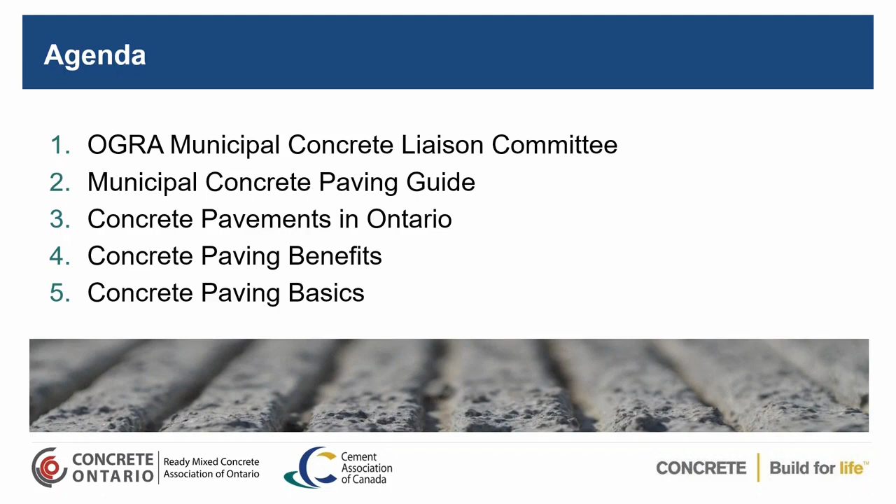Now, the Ontario Good Roads Association Municipal Concrete Liaison Committee has been very busy, and it's a committee that was formed back in 2012 to help address any concrete-related issues on the municipal front. So whether you're looking at sidewalks, bridges, ordering concrete, the committee looks at providing guidance to municipalities about how to do things properly and educating them about emerging trends and specifications.

Now, as I mentioned, the committee has been quite busy over the last few years. We developed 3 different guides. The first guide, the Best Management Practices for Municipal Concrete Infrastructure, is an overview of all sorts of different infrastructure related to concrete, with some best practices guides on how to maintain it and how to build it.

Then 2 years ago, we focused more on flatwork construction. There's still a lot of problems when it comes to sidewalks and curbs, and we wanted to specifically drill in on that subject to help municipalities out, so we developed that guide. And then last November in 2019, we developed the Municipal Concrete Paving Guide, which we will be overviewing today.

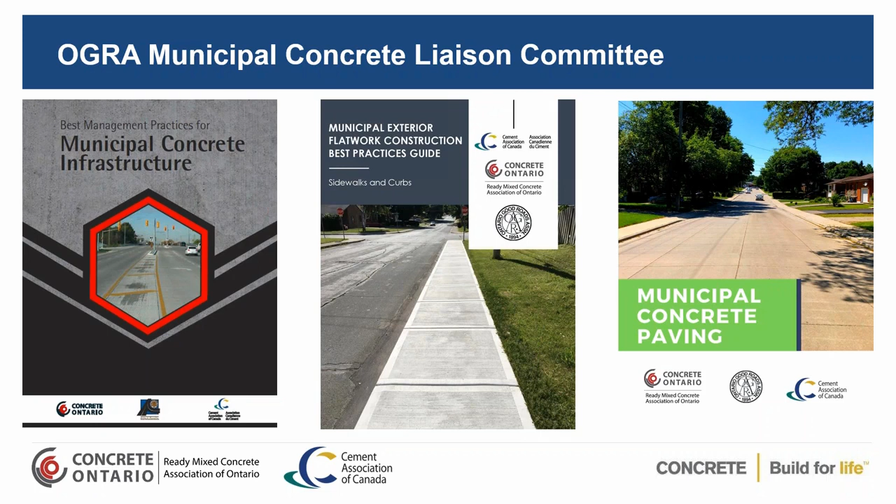Here on the next slide, this guide has been a few years in the making. It's showcasing all the different projects that have been done over the last few years, all local Ontario projects. The guide will continue to be updated and will continue to emphasize the many different applications where concrete makes sense, whether it's a bus pad, a turning lane, an intersection, a road, a roundabout. There are many applications where concrete is simply the superior building material, and that's something we want to showcase in this guide. It is a free document.

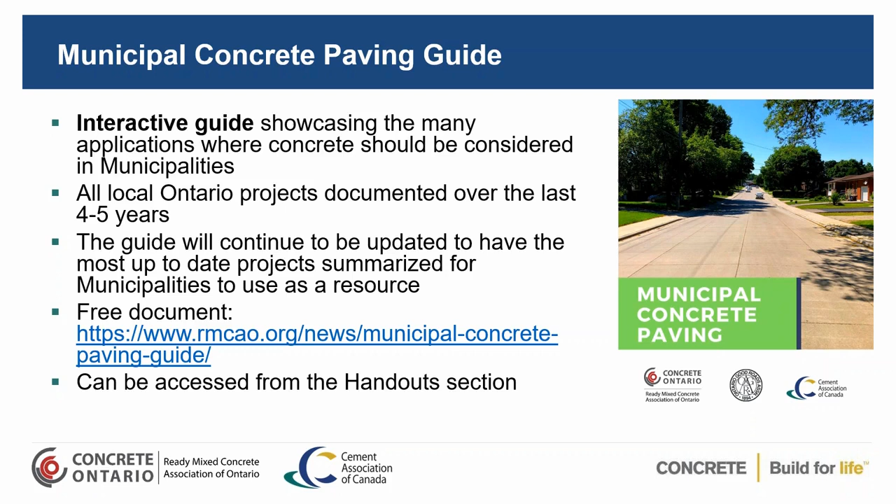It's available on our website, and it can also be accessed from the handout section as part of your GoToWebinar pane. Now, it is an interactive guide, and what do I mean by interactive? Throughout the document, you will find these little PDF icons that say there's an available resource. You can click to explore it. If you click one of these PDF icons in the document, you're able to access all sorts of supporting information.

Documents such as the Integrated Materials and Construction Practices for Concrete Pavement Manual, which is developed by the National Concrete Pavement Technology Center from Iowa State University. They also have concrete pavement distress assessment and solutions. Then we also have, for example, an American Concrete Paving Association Concrete Intersections Guide.

We also work with the University of Waterloo and their CPATT program on a project, so that report is available. And then even OPSS standards when it comes to concrete pavements are also available as part of the guide by using one of the clickable links.

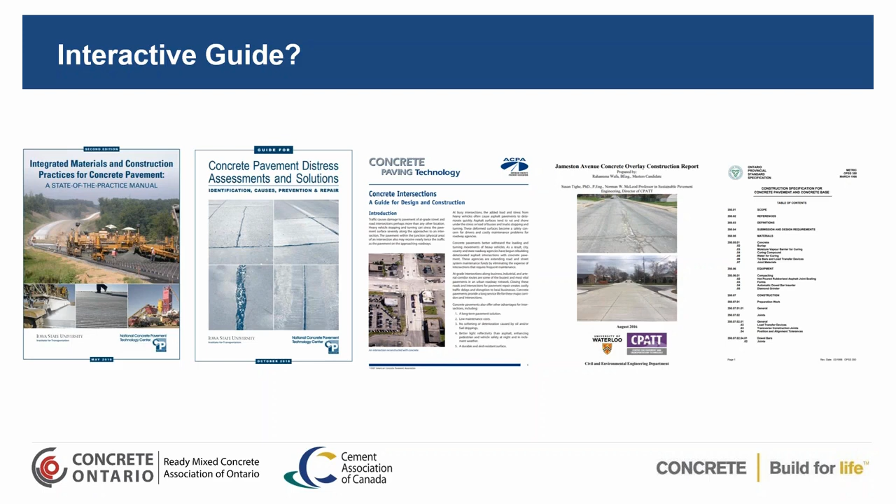Not only do we have supporting documentation available, we also have this other icon throughout the guide, which is a little video guide. If you click any of these video icons, you can pull up YouTube videos when it comes to either construction practices or specific construction practices such as vibratory truss screed paving, for example, here on the screen, transverse tining, curing.

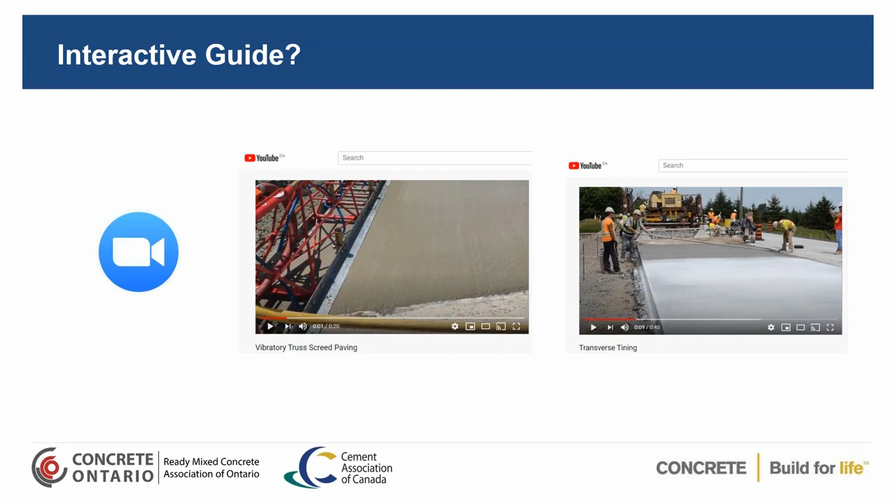There are a few videos available from some of the projects that you can access using this other icon. Now, when it comes to concrete pavements in Ontario, you will see only about 5% of all roads are concrete. Windsor has the highest percentage of exposed concrete pavements, about 40%. As a comparison, in Winnipeg, you're looking at about 80% of the street network being concrete pavements.

So why is it such a small percentage in Ontario? There's numerous misconceptions when it comes to concrete pavements that we do need to address. One, for example, is that concrete requires 28 days to cure, which is completely false. Curing relates to maintaining moisture within the concrete to allow it to gain its durability and strength.

The way we achieve curing with concrete pavements is you spray on a curing compound, which is a very, very quick procedure. You spray it on, it traps the moisture within the concrete, allows the concrete to hydrate and gain all its properties. So again, curing is very, very quick.

The more important aspect is strength gain. You do need about 20 MPa to open concrete pavements to traffic, out of the designed 32 MPa Class C2 concrete. That can typically be achieved with regular concrete in about 4 to 5 days, depending on the ambient temperature. In summer temperatures, obviously you're going to achieve that strength a lot faster versus fall and winter temperatures.

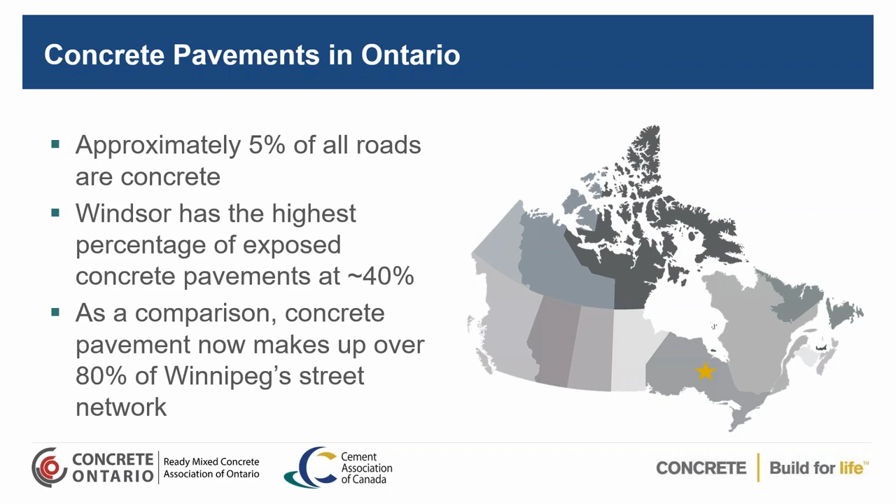You can drill in dowels, re-pour accelerated concrete, and open up that road very, very quickly, minimizing traffic, minimizing congestion. So utility cuts can be done, and it is something we will address in future webinars that will be coming up in the next few months.

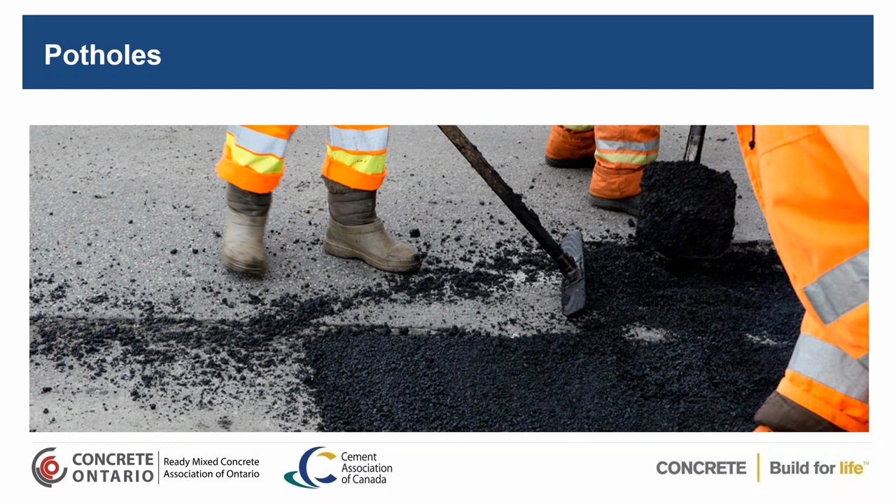Now, one thing I do want to quickly talk about are potholes. We all experience potholes. It is a major deficiency when it comes to asphalt roads. They're dangerous, they can damage your vehicle very severely. But one great feature about concrete is that we do not have potholes. Concrete is a rigid structure that doesn't deform, and overall potholes can be completely eliminated if you use a concrete pavement. Now, just to give an overview of how potholes are actually formed, I'll show you guys a quick video here.

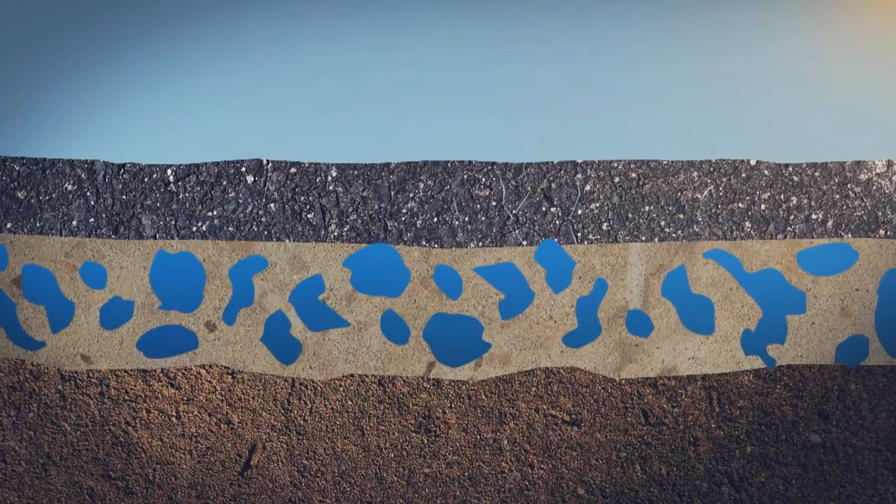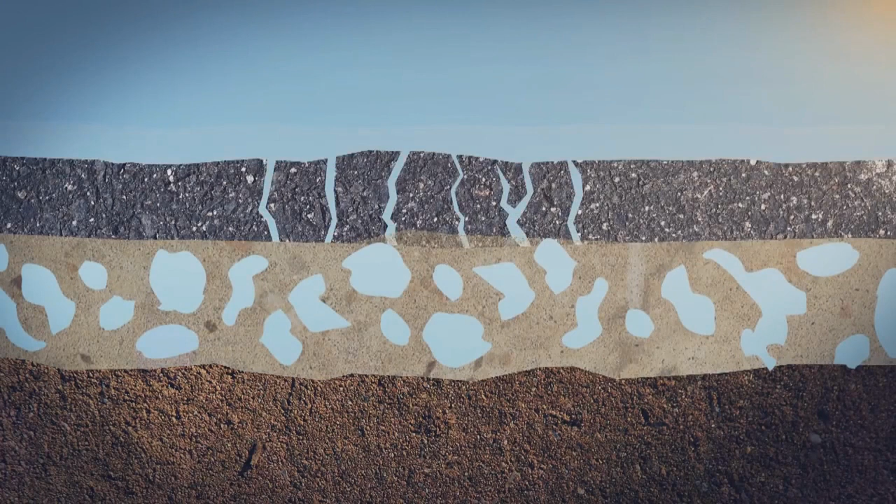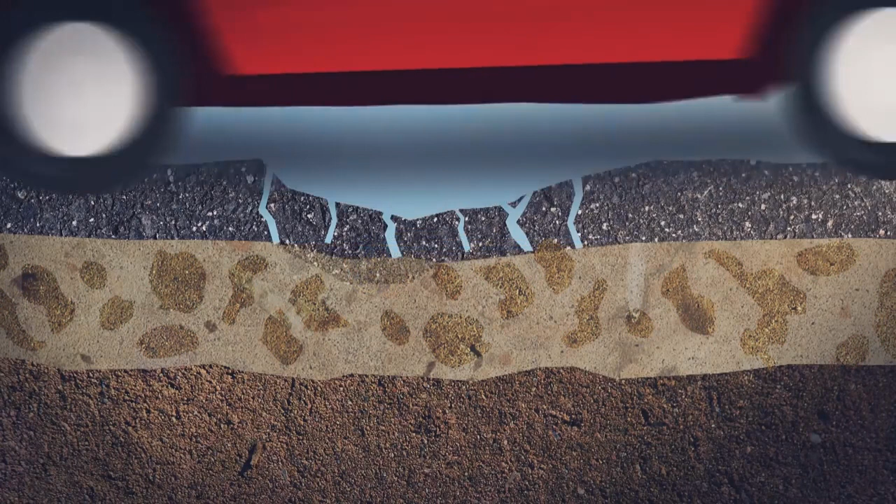Potholes form when water seeps into the road and collects underneath. When it freezes, it expands and pushes up the road's surface. As cars drive over it, more cracks form. Eventually, the sun returns and thaws everything out, including the water trapped below the road's surface. It causes an empty pocket to be formed, and that eventually collapses under the weight of traffic, leaving behind a pothole.

So that's a very quick explanation of how potholes form. And why am I talking about potholes when it comes to concrete paving? Well, it's something that boggles my mind every year. For example, the city of Toronto spends about $25 per pothole every single year, and they budget about $4 to $5 million of their annual budget towards this problem.

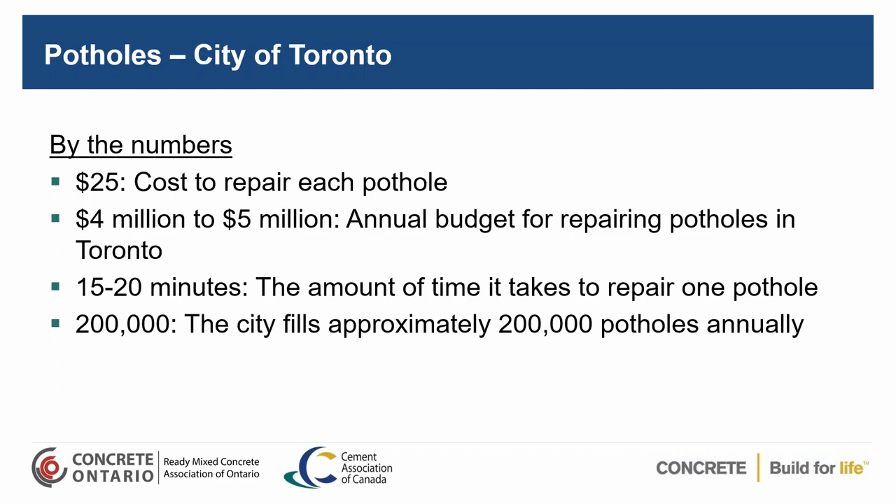It takes about 15 to 20 minutes to fix each pothole, and they expect to fill about 200,000 potholes annually. In 2020 so far, they've already fixed 86,000 potholes, and fixed 12,000 in just the past month since everybody's home with COVID-19 isolation. Crews are able to get out there and have fixed 12,000 potholes just in the month of April alone.

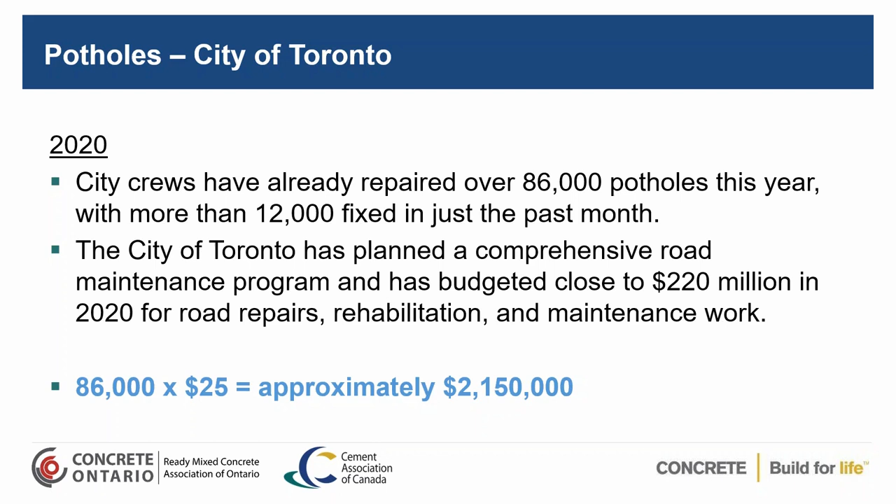Their budgeted cost for road repairs, rehabilitation, and maintenance work is about $220 million, and of that, $5 million is just to repair potholes. So far, the city of Toronto has spent $2.1 million approximately on potholes already. They are projecting to spend another 2.8 million by the end of the year. But it is very mind-boggling that we spend $5 million a year fixing a problem that will continue to happen.

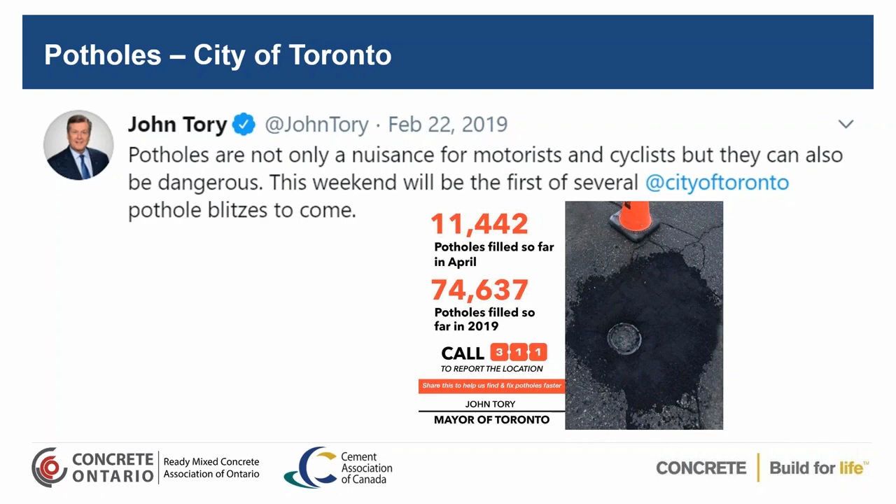John Tory even tweeted last year that potholes are a nuisance, they can be dangerous, and then he kicked off the annual pothole blitz of fixing potholes. And then it's being glorified how many potholes can be filled - 74,000. This is a tweet that was sent out last year. They already filled 74,000 potholes at this point, and it continues to be an issue.

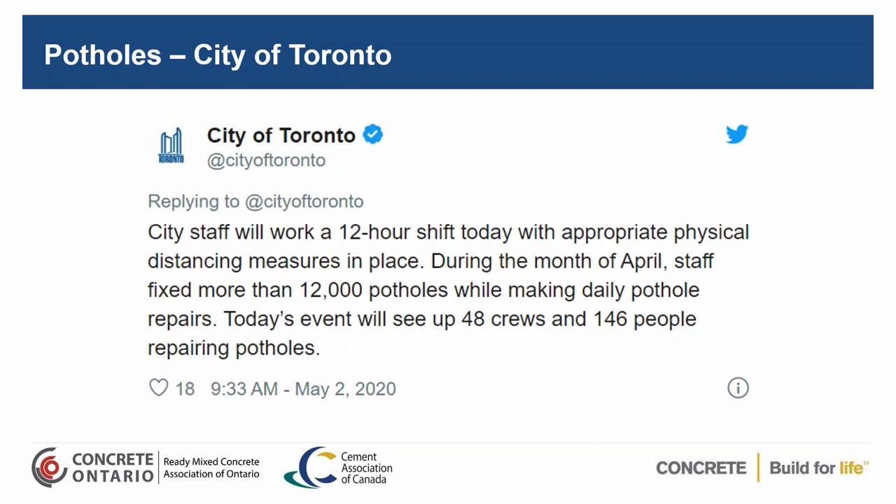Now, this really boggles my mind, considering there is a better solution, there is a better alternative. And this great picture over here - when I saw it, the first thought that came to mind was, maybe we should try concrete. Maybe there's a better solution to all this. Maybe we shouldn't spend $5 million trying to put a Band-Aid on a broken arm. This will not go away, and maybe we should look at an alternative when it comes to road maintenance.

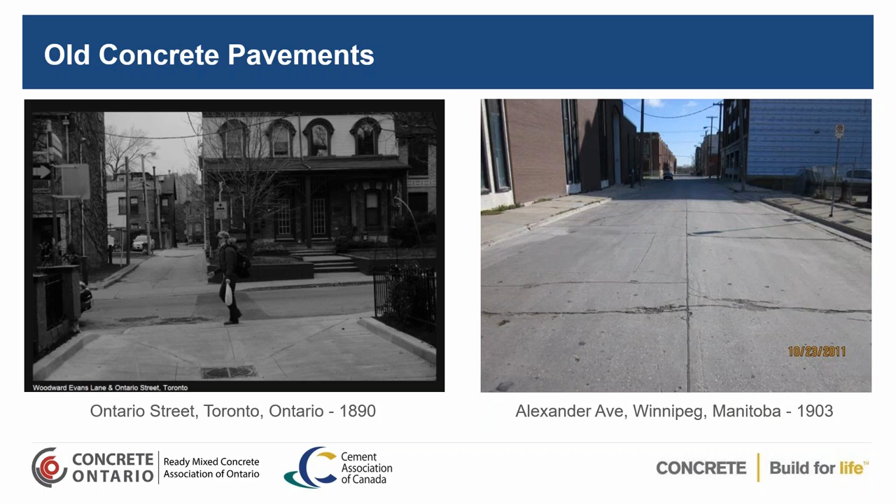So what we're going to do is show you a video the cement, concrete, and aggregates industry in Australia developed, trying to show the benefits of concrete pavement. The American Concrete Pavement Association took that document and modified it. So the next slide will be a little video on why you should choose concrete pavement. Concrete roads are the strongest and most durable, performing better under heavy traffic loads and lowering costs across the lifetime of the asset.

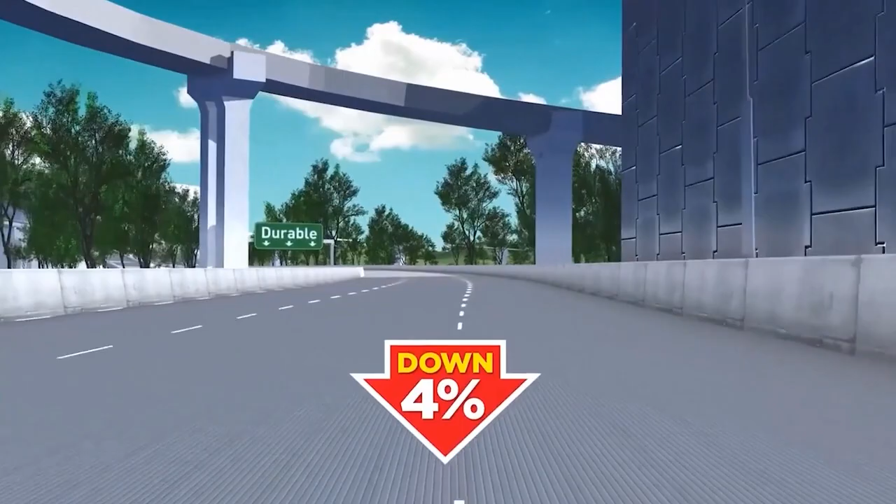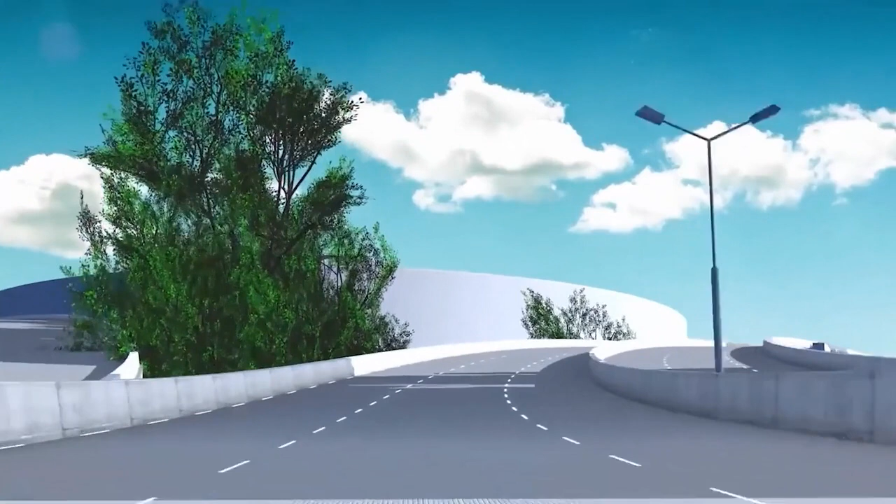And because concrete is rigid, it doesn't deform, leading to heavy vehicle fuel savings in the order of 4% when compared to alternatives. Concrete pavement is also durable in any environment - no rutting, no potholes, no shoving. Concrete road surfaces are engineered to be skid resistant, and in fact, stopping distances are shorter, especially in wet weather. Safety is a clear advantage when using concrete pavements. Concrete roads are lighter in color, so they reflect more light and heat energy when compared with dark surfaces.

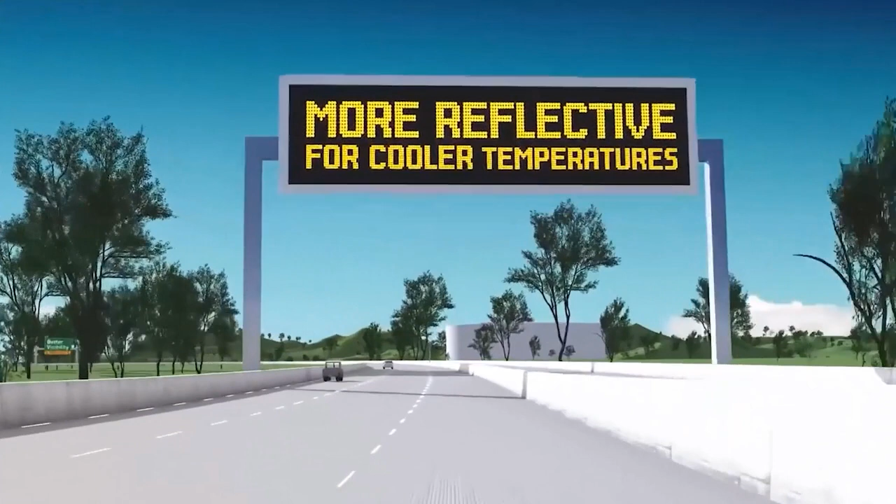Studies show they are twice as reflective, which can contribute to a lower urban temperature, enable energy-related cost savings, and improve nighttime visibility and safety.

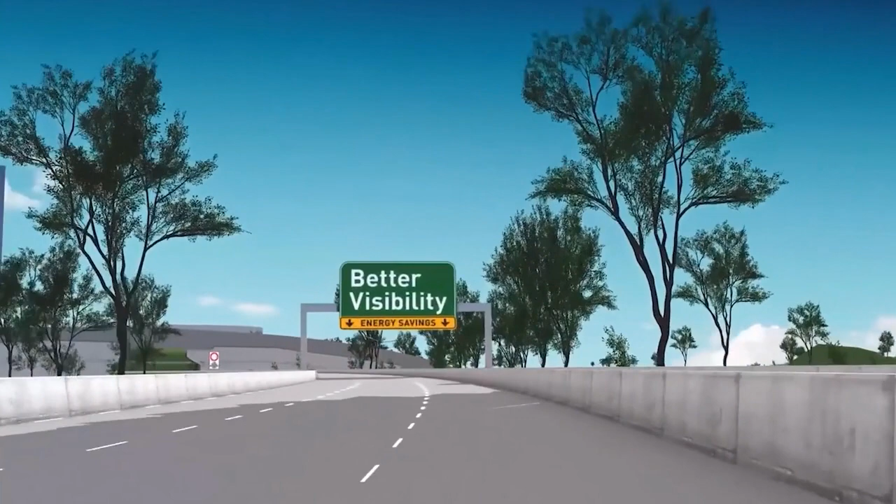With concrete, you are choosing a solution that can deliver lower ongoing costs. Independent studies have found that concrete pavements compared to asphalt alternatives can reduce ongoing maintenance costs by over 50% and deliver savings in the order of 25% across the life of a major road project.

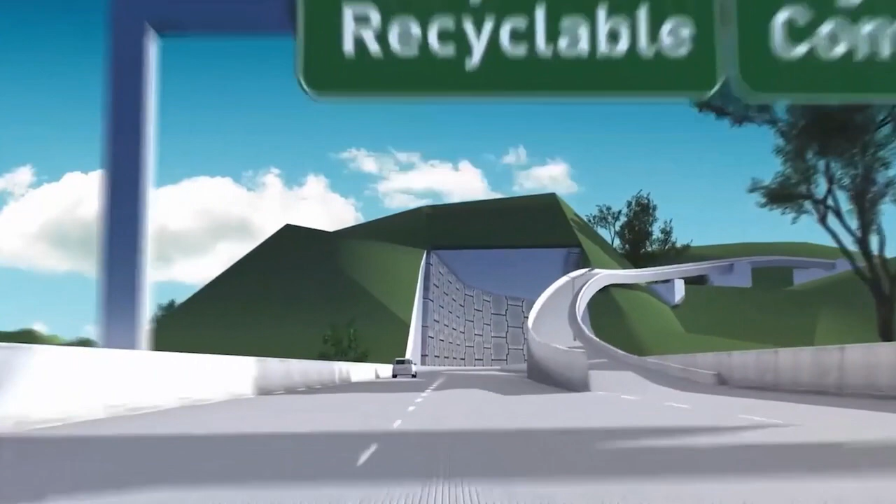It's a product that is fully recyclable with high local content and raw materials from local manufacturers. It's resilient, standing up to extreme weather without melting in the heat or weakening after being inundated from floodwater. Its innovative, low-noise, smooth surfacing makes for a quiet ride.

So to summarize, beyond the longevity aspect of the concrete pavement and the decreased maintenance, there are also some environmental benefits you can look at.

Better fuel consumption, as we stated, and there will be a short video on that with research done by NRC.

Less fuel consumed during construction. Because the concrete pavement structure has substantially less granular material, there's a lot less movement of material coming into the job site, so your construction is consuming less energy that way.

You have recycling of byproducts. You can use fly ash, blast furnace slag in your mix. It stabilizes them within the concrete and improves the quality of the concrete, but also prevents it from going into a landfill. You have non-renewable materials reduced, and better light reflectance.

Concrete actually reflects light in a diffuse manner. It's like taking a ball and throwing it into a pool — the water splashes up at all angles. With asphalt, it's specular — when you throw the ball, it's like hitting the ground, it'll bounce up at one angle. So you get better light reflectance on a concrete pavement.

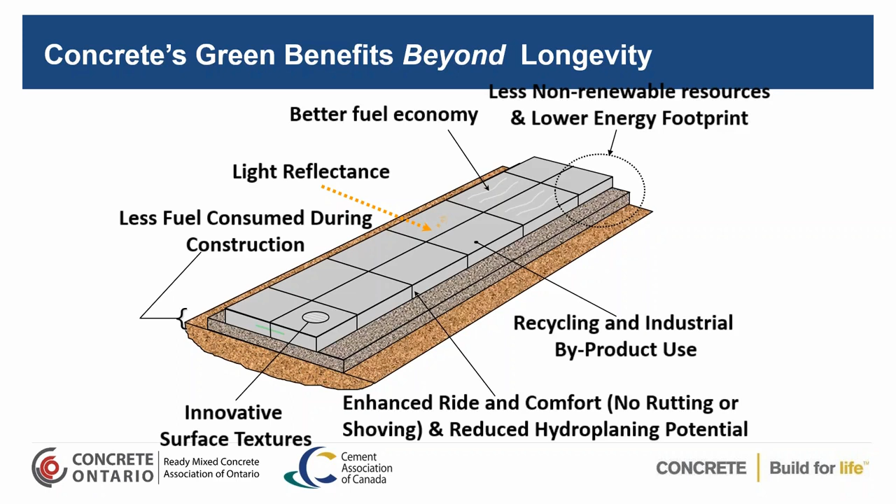The main binder in concrete is cement. The energy footprint in cement compared to the main binder in asphalt, which is liquid bitumen — a natural source of feedstock energy — means the energy in the construction process and in the overall pavement is less for concrete pavement.

When I'm talking about reduced potential for hydroplaning, one thing about concrete pavement, whether you have transverse tining or longitudinal tining, is you have the macro texture — that's the tining within the concrete that allows water on the pavement to go into those grooves, and when the tire crosses the pavement, the water goes down and is pushed out from those areas, maximizing the tire-pavement interface.

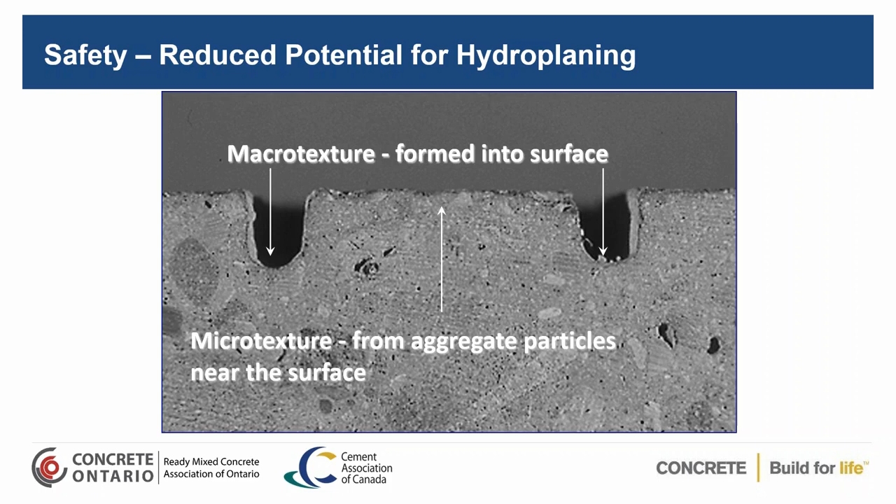There's also what's called a microtexture — that's the surface of the concrete. If you have high silica content in your sands, and also use a burlap drag, you get a very good skid resistance friction value for your pavement.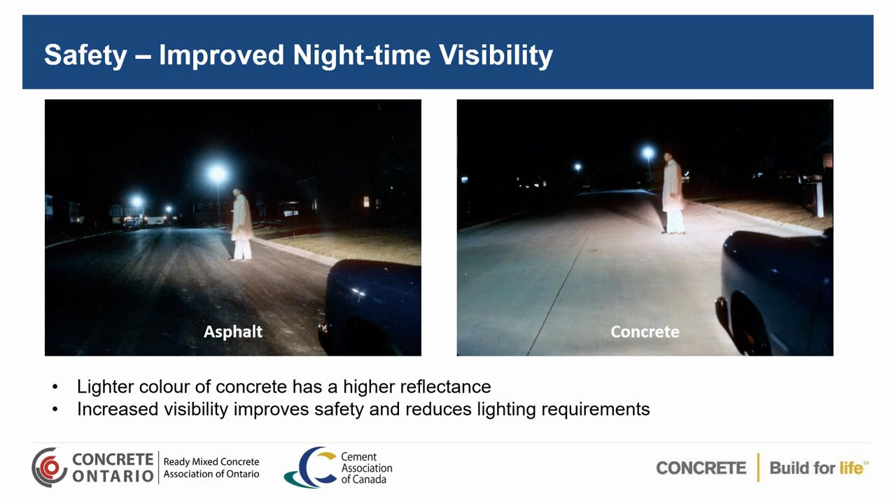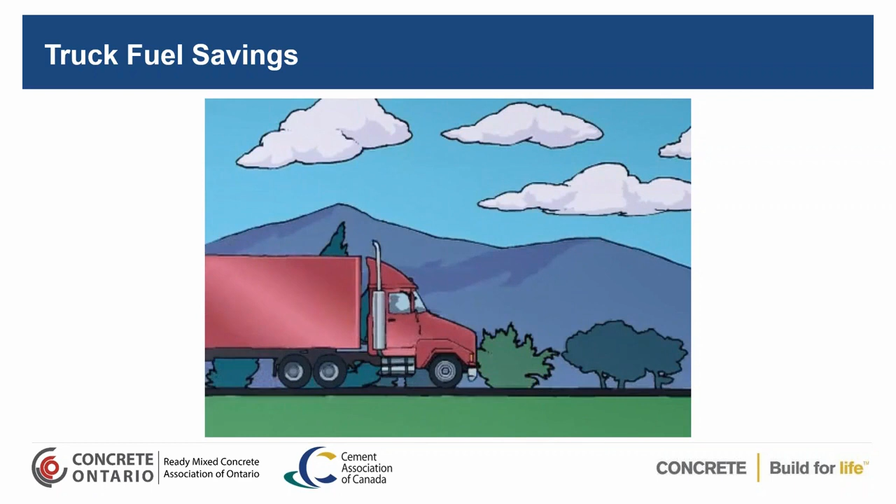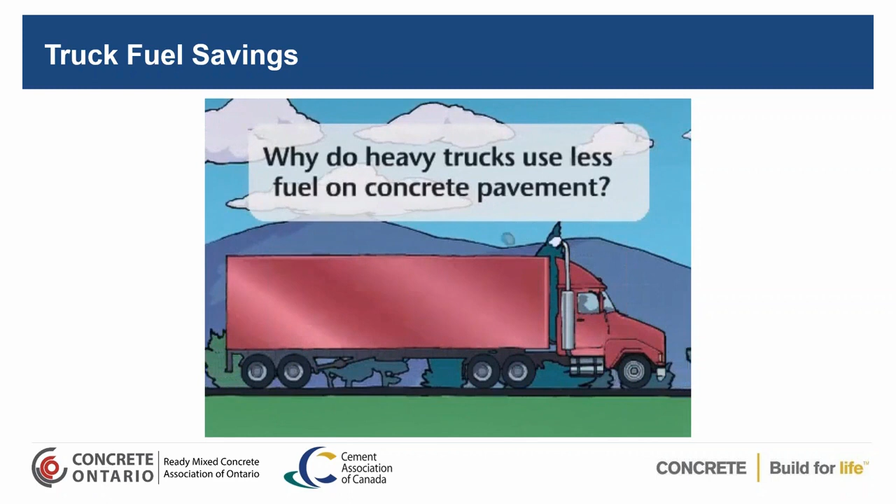This is the slide I was talking about — the National Research Council of Canada did a series of studies looking at fuel consumed on concrete versus asphalt. They used a van semi-trailer and a tanker semi-trailer to analyze fuel consumption. The theory is that being a rigid pavement, concrete would deflect less than an asphalt pavement. In the diagram, we're showing the deflection and fuel consumption, and a bit of a bow wave is exaggerated in the picture just to show there's some resistance when the tire goes over the pavement.

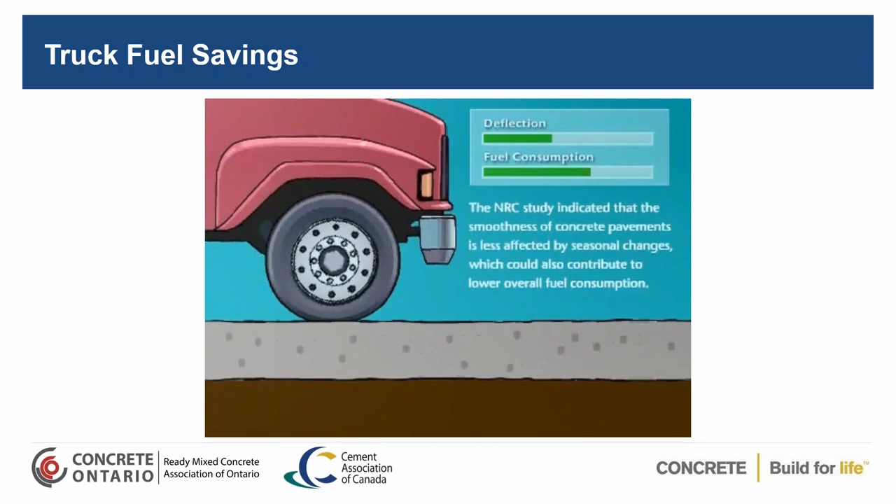As you proceed from asphalt onto concrete, you'll notice the deflection is less. MIT did a study on this as well and noted that the stiffness of the concrete pavement had around a 3% fuel savings. NRC's research, depending on whether you have a van semi-trailer or tanker semi-trailer, showed savings ranging from 1% up to 7%. So there's definitely a fuel savings to take into account when operating on concrete versus asphalt.

So what I've done here is show an example of asphalt versus concrete together to show the cross section of the two pavements. You'll notice that the asphalt pavement structure is thicker than the concrete pavement structure.

The reasoning behind that is to have an equivalent pavement design. Asphalt, being a flexible system, will deflect the load through the asphalt down to the base, down to the sub-base, and even down to the subgrade. I'll have a picture showing that in a minute. For concrete, most of the load is taken within the concrete pavement itself.

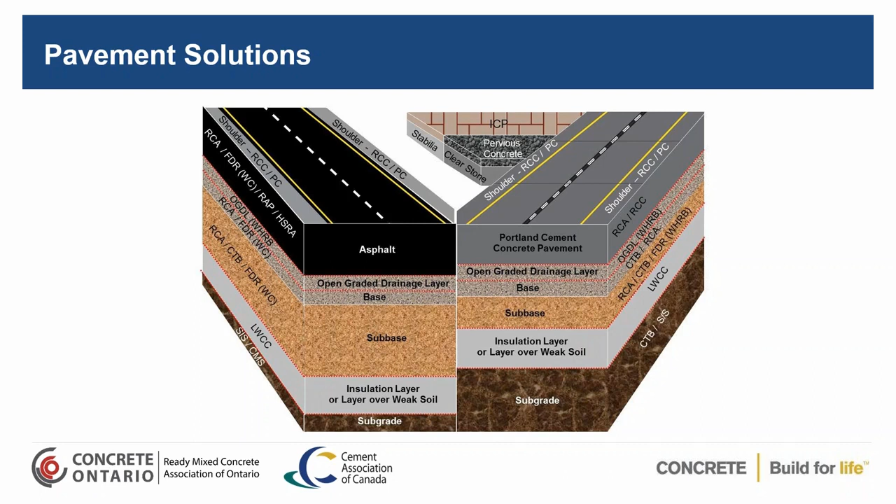Now, concrete can be, as you see here, ICP, that's interlocking concrete pavers. There's pervious concrete that can be used in certain situations. There's roller compacted concrete, there's conventional concrete, and you can do cement treated bases or cement modified soils. There's a lot of different aspects you can do when you're looking at an overall pavement structure.

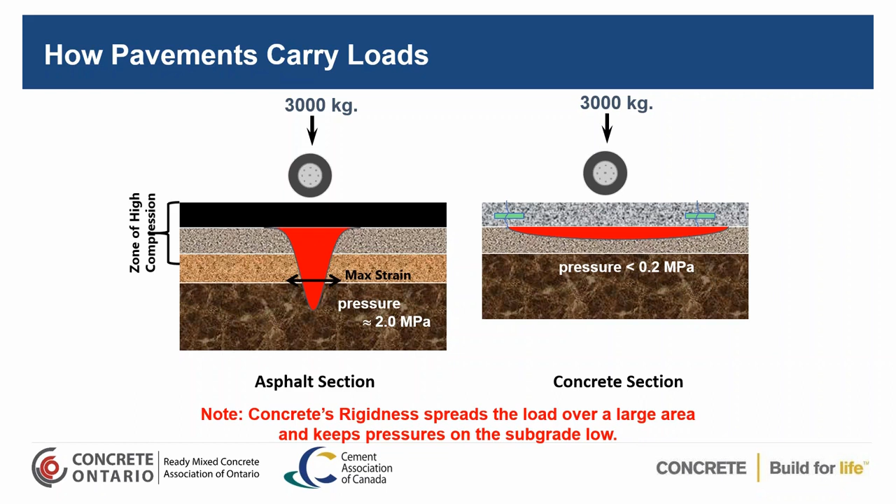Municipal operations, a lot of times you'll just have one layer of granular material. That would be the granular type 1 or the granular A, depending on what province you're in. Next slide, please.

So what are the basic components of concrete pavement? First of all, concrete, when it's placed, will be at its maximum size. You normally have, with the Class C2 exposure concrete, a water cement ratio maximum of 0.45. You need about 0.25 to 0.26 to have complete hydration of the cement, so there's a lot of excess water that has to evaporate out of that concrete.

Because of that, you want to control the cracking. So to control the cracking, you put a longitudinal joint in the direction of the traffic, and then you're going to put transverse joints into that pavement.

The transverse joints, depending on the thickness, will vary anywhere from 4.2 to 6 meters if you're into a pavement for an airport. And if you're going with thinner concrete pavements, you'll have joint spacing that could be 1 meter. It all depends on what you're looking at in the design.

So the transverse joints are put across, perpendicular to the direction of traffic, and those control the cracking. The longitudinal joints are in the direction of traffic. You'll also put a tie bar in the longitudinal joint.

The tie bars are usually 15M and around 450 to 460 millimeters in length. They're ribbed and epoxy coated, and they keep the concrete from drifting apart in the longitudinal direction. There's a lot less expansion and contraction, but there's no confinement on the sides of the pavement, so you want to hold that together and not create a maintenance problem.

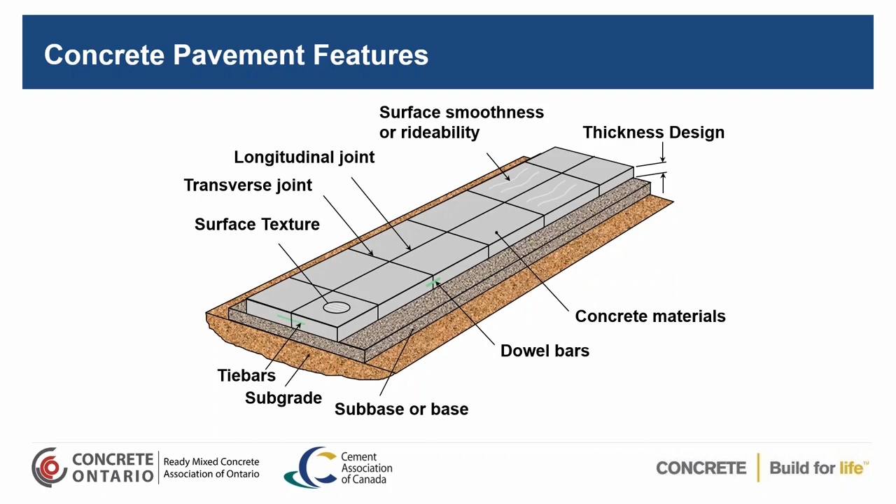So underneath the concrete is normally a base. Sometimes you have a base and a sub-base. Next slide.

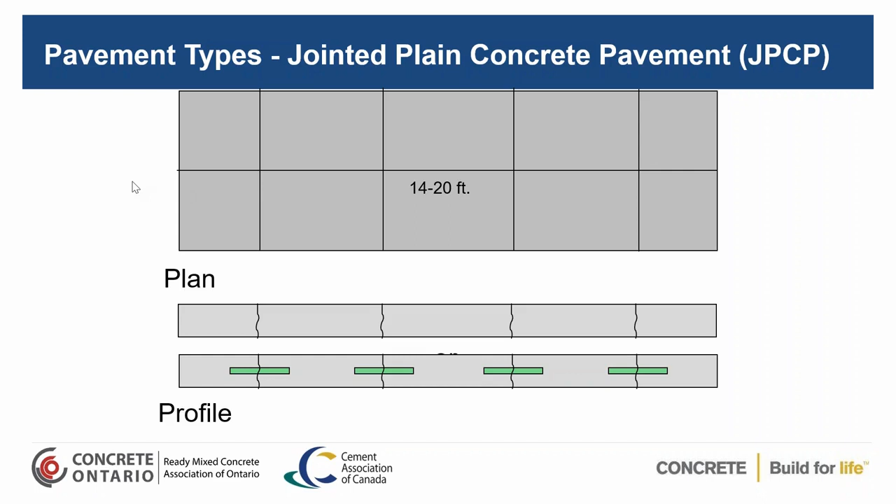Longitudinal joints are always cut because it's a long distance, and they're cut at 1/3 the depth of the concrete. Next slide.

And why do you need to cut these joints? Well, the cement particles are going to absorb the water, the moisture, to hydrate. So when it's doing that, the meniscus is formed, and there's a surface tension that develops. As it uses more and more water, the surface tension starts to increase.

When concrete's first placed, it's in its weaker state, because it takes time for the cement to hydrate and for the concrete to gain strength. So what happens is, when the tension is stronger than the concrete strength, you get a crack. So to prevent that from cracking randomly, you cut the joints.

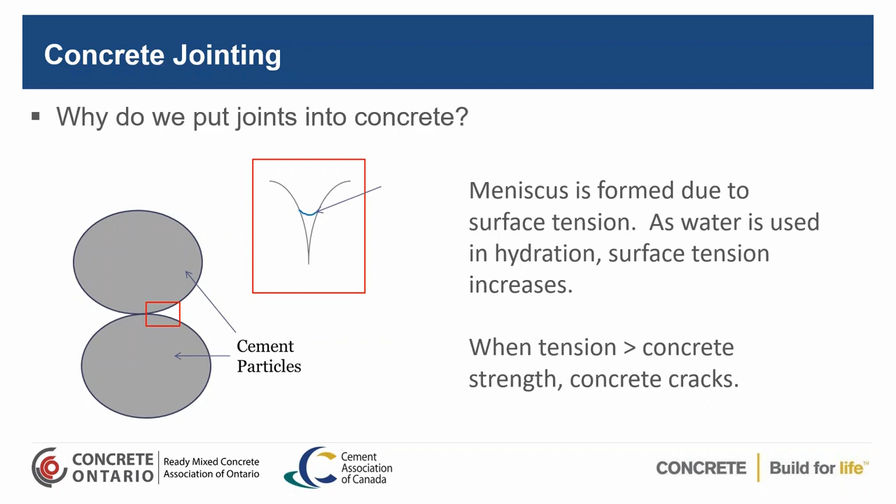Next slide. So when you're cutting the joints, you're going to use a saw. That saw can either be an early entry saw, and if you have an early entry saw, you can get on the concrete within 1 to 2 hours. You're normally cutting it to a depth of 1 inch to 2 inches, depending on the thickness of the concrete. If you're using a late entry saw, your timing could be anywhere from 6 hours to 12 hours.

But you have to understand that the concrete will start to crack. And if, when you're doing your cutting of the joints, you do get a crack developing in front of the saw, what you need to do is stop, because that's already starting to crack. You leapfrog 2-3 joints, relieve some stress on the pavement, leapfrog a few more, and then you relieve the stress on the concrete. Then you go back and cut the intermediate joints, so that you make sure all of the joints are operating.

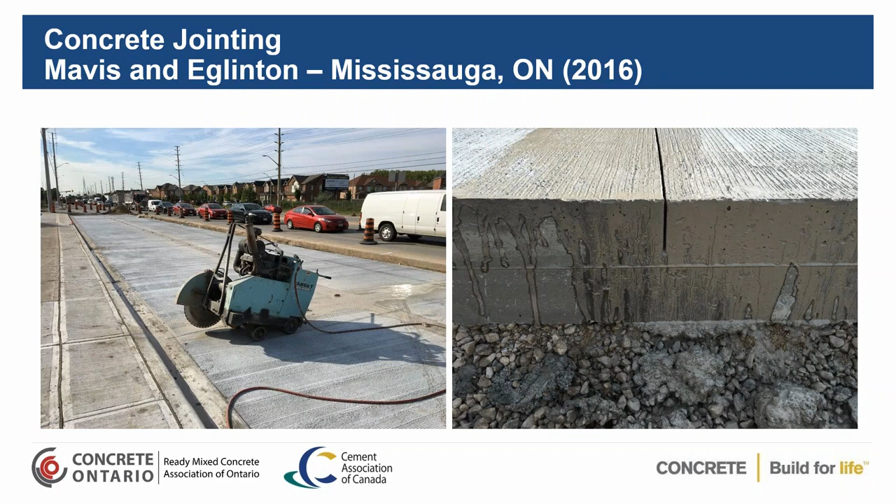So why do you need load transfer devices? Well, if you have a lot of heavy traffic and your pavement's in the 200 millimeter range, you're going to need some load transfer assistance, because over time, that aggregate interlock that keeps the transfer of the load from one slab to another will actually decrease.

And to the point where, if the traffic is too much, you'll end up getting a poor load transfer, and you'll start getting faulting. What happens is the leave slab deflects when the tire goes off onto the next slab. That slab will rebound up and the other slab will go down, starting a pumping action.

That pumping action, if water is available and there's a source of fines, will pump the material out through the top or to the side of the pavement, creating a gap underneath the pavement and creating that drop in the slab. That's the thump, thump, thump that you get from older concrete pavements that don't have dowels.

So you can retrofit dowels if you have an older concrete pavement, which I believe the Highway 427 in Toronto has had dowel bars retrofitted in some cases. And the dowels will vary in size from 32 to 38 millimeters, and that depends on the thickness of the pavement and the loads you're dealing with.

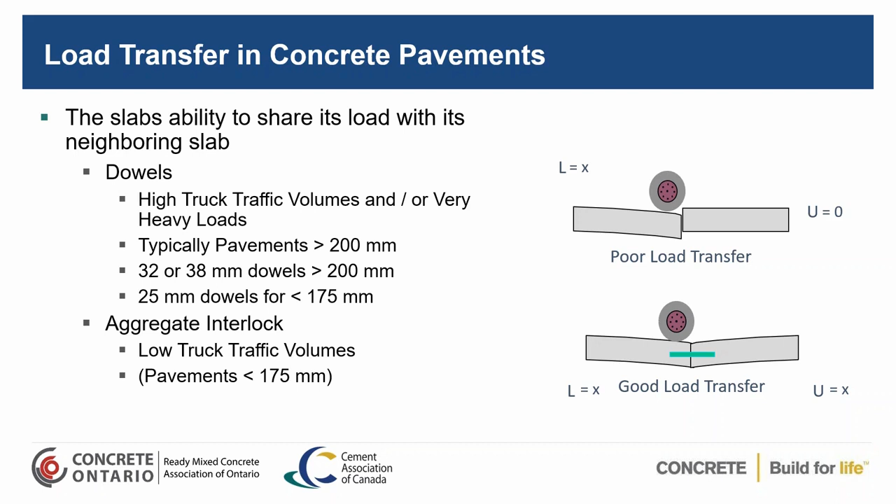Sometimes slabs in the 150 to 175 millimeter range will have dowels placed in them too, but the dowels have to be thinner. They go with 25 millimeter dowels to ensure that you don't expose or hit the dowel when you're cutting your joint. Next slide, please.

Now what I'm going to do is just go over a few different projects. This is a project that I actually worked on before I went back with the Cement Association of Canada, when I was with Englobe. We were given this design to do this concrete pavement at the fire station 7-3.

Now, this is a very complicated pavement jointing pattern here because of the configuration of the area. So instead of going with dowels on this job, around a 210 millimeter with dowel, we went with the 250 millimeter no-dowel option to minimize the construction issues of putting dowels at angles and things like that. This was done in 2 stages.

You have the front part of the building leaving 1 door available so this could stay in operation. They wanted to make sure they were an operational fire station the whole time. So the first portion was done in the front.

Then once that was done and completed, they allowed it 7 days, but allowed it to be operational with no traffic on it. Then they opened up the front section, closed the back portion, and did the back in the alleyway. That was the Class C2 exposure, 32 MPa mixed use, in that project.

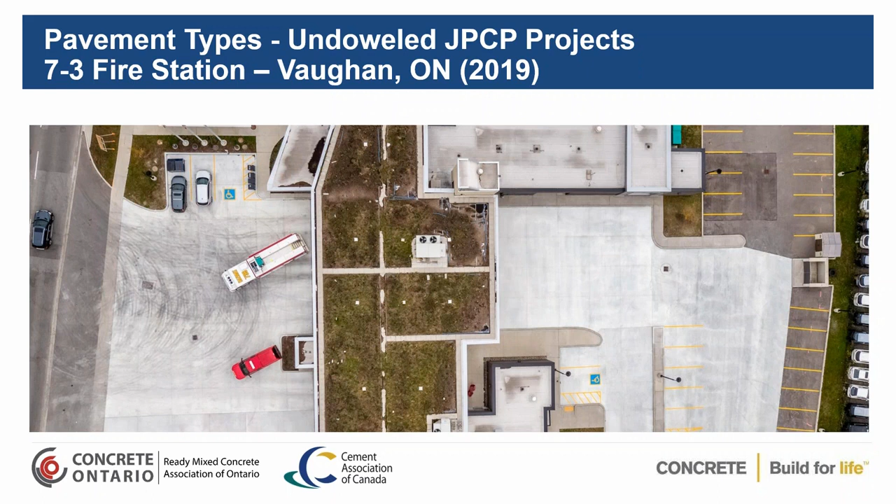So this is another project that was done in Courtney Park and Kennedy. This was a reconstruction. There was severe rutting in the asphalt. So what they decided to do was go with concrete pavement in this area, and they used dowels for load transfer.

Because it was a turning lane, it was getting a lot of static loads, and due to the braking and resting of heavy trucks in this area, they were getting severe rutting. So they replaced this area with concrete. Next one.

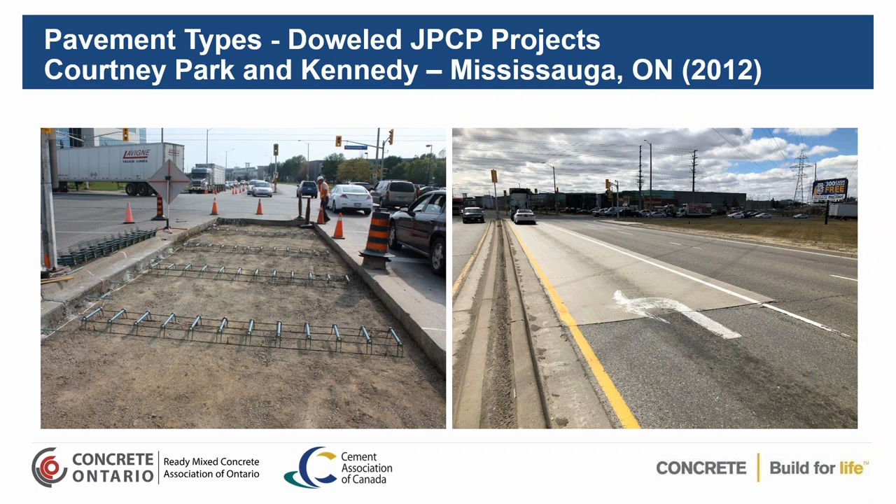Next one is Harwood and Bayly. This is in Ajax, and I actually was out to look at this not too long ago. So what they had is, again, issues with raveling, flushing, rutting, some distortions, longitudinal cracks, and transverse cracks in the asphalt. It needed to be replaced.

They made the decision to go with concrete pavement because of the amount of trucks in this area. So they ended up going with 200 millimeters of concrete pavement, and they have dowels for load transfer, and they put in tie bars. You can see the tie bars in the picture on the left, to allow them to keep those longitudinal joints tightly together. On the right-hand side, they actually used a boom to supply the concrete instead of the ready-mix truck directly.

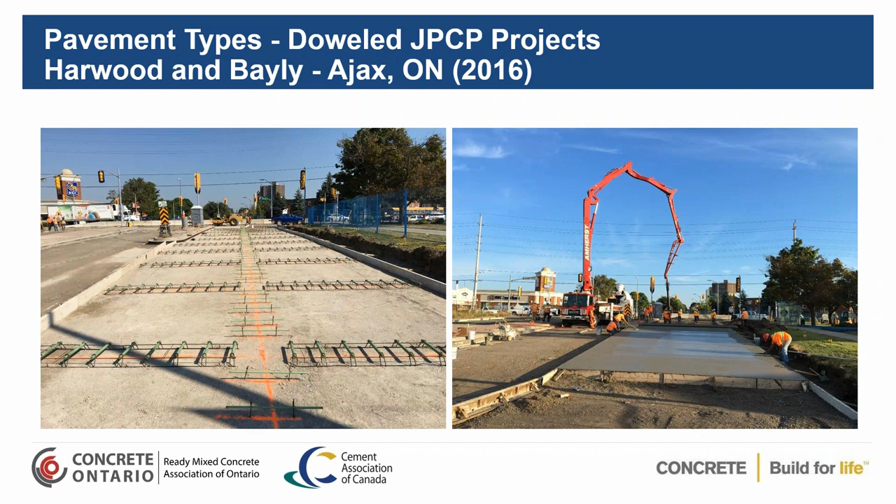So this concrete here is being placed by a vibratory screed. And again, there were dowels placed, and you'll see they have dowel baskets. Now, one key thing with these dowel baskets is they have to be secured properly to the aggregate base so they can't be moved during the placing process. This was, again, a Class C2, 225 millimeter pavement, Class C2 exposure, at 32 MPa.

You see on the right-hand side that they put white curing compound on the pavement to ensure they keep the water in the pavement so it can completely hydrate. You want to make sure the surface is covered very well so the surface stays good and strong, and so you won't have evaporation occurring and causing weaker concrete on the surface.

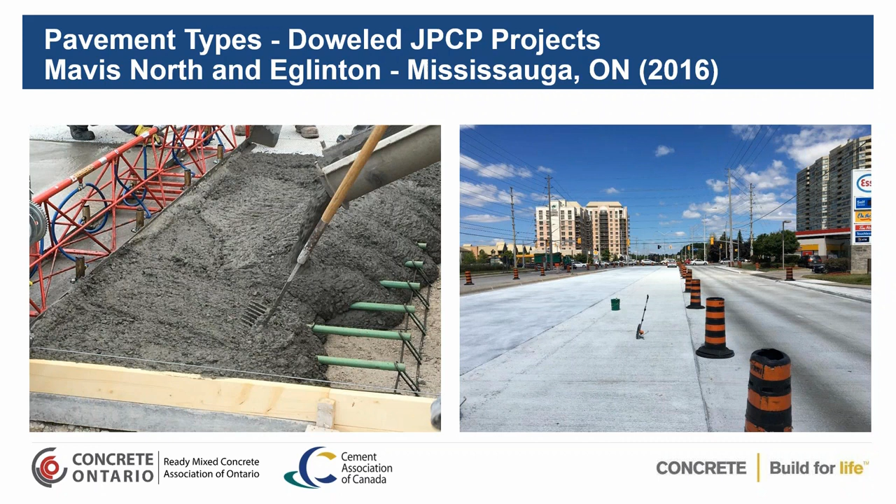Here's another project. 200 millimeters of concrete pavement was placed at the bus pad. In the bus pads, they were having a tremendous amount of rutting. Again, you've got heavy static loading and turning movements coming in and going out. So they chose to go with concrete pavement, 200 millimeters with dowels.

They used a vibratory screed in this, and a white curing compound. You'll see they're putting a broom finish, a transverse tining I should say, into the pavement.

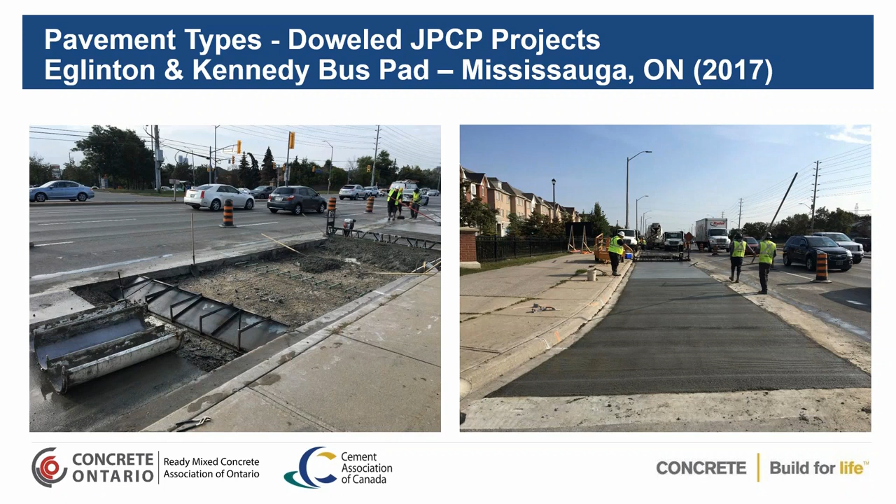So here's another project in Huron Church, Windsor. This is actually a heavier truck traffic area. This was 310 millimeters with dowels.

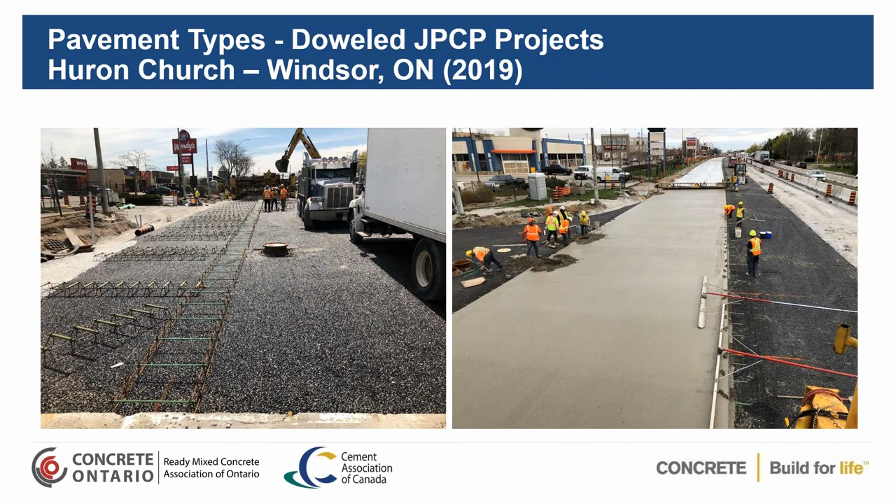They also put an open graded drainage layer under this because this would have been an area MTO may have been involved in. For very heavy traffic on the 400 series highways, MTO requires an open graded drainage layer underneath the pavement to enhance drainage capabilities. I'm not a real big fan of open graded drainage layers because some of the paste can go down into the layer, which changes the effective thickness of the pavement, and also increases tension in the concrete as it tries to shrink. If you don't get on and cut your joints early, you can get random cracks developing, but there are certainly some benefits from the drainage point of view.

And here's another concrete pavement being placed on Brampton Street. This was a street that had a tremendous amount of deterioration in the asphalt pavement, and it was going into an industrial area. So they chose to go with concrete pavement.

They were doing this one by hand finishing. He's doing some bull floating right now, some hand finishing. You can see the guy on his knees. They do have dowels in this. Again, it's a 200 millimeter pavement with dowels. They placed 150 millimeters of Granular A underneath it.

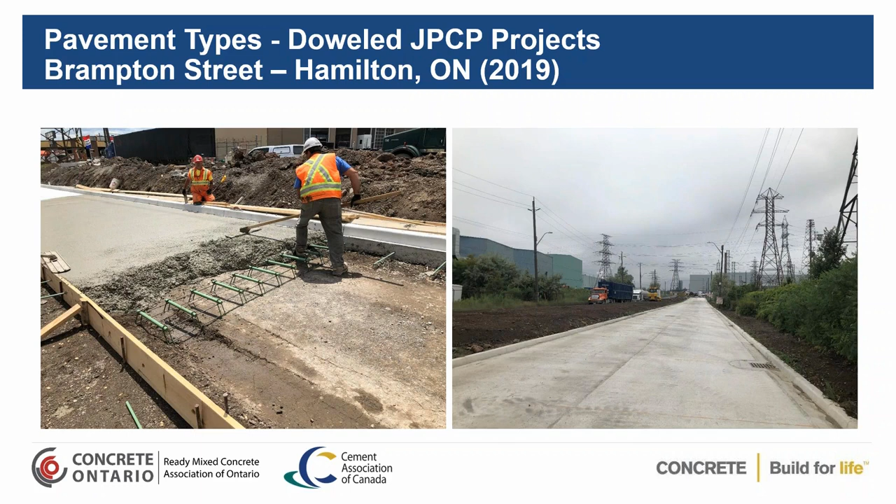And they did put a broom finish on this because it's a slower speed area, so they didn't need the tining. And then they used white curing compound on it again for the curing. Next slide, please.

This is Parkdale North in Hamilton. You'll notice on the left-hand picture that they've got tie bars into the curb and gutter when that was originally placed. So what they're trying to do here is make it an integral curb and gutter so that part of the load on the concrete pavement will actually be transmitted into the curb and gutter, and that allows you to thin up the pavement structure a little bit.

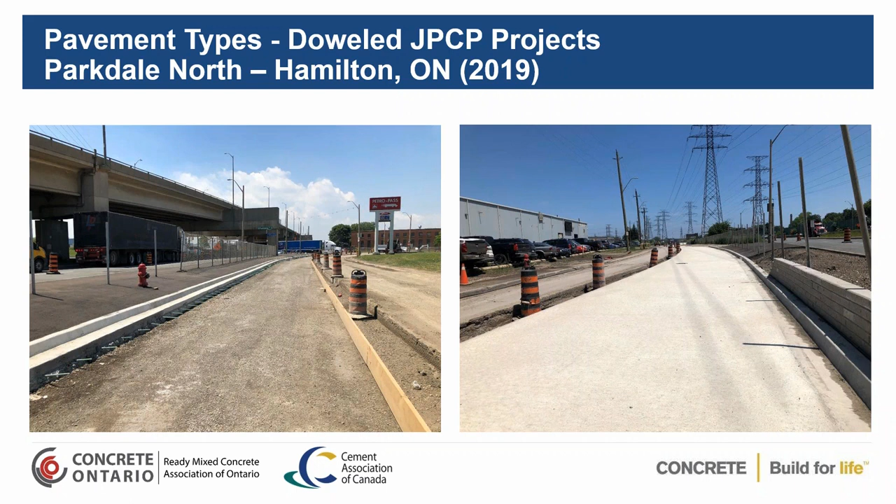Here they went with a 200 millimeter pavement on 150 millimeters of granular base. It was a Class C2 exposure again. Notice that we're always seeing Class C2 exposure. It's very important that you follow CSA A23.1 Class C2 exposure, and I'll have a slide on that shortly, to ensure that you're getting the proper, good concrete material. This was a 32 MPa project. This one, they're putting macrofibers in it as well, to ensure that they could handle the heavy loads they were dealing with here.

In addition to new construction, where you're putting a new concrete pavement, taking up all the asphalt and redoing some of the granulars in some cases, there are systems called concrete overlays. Sometimes concrete overlays are bonded to the system, or sometimes they're unbonded. You can bond them when you have an asphalt pavement that's fairly thick and you're only getting surface deterioration, maybe the top 50 to 100 millimeters, but continuous wear and tear. You can bond a thinner concrete on top, utilize the asphalt strength that's left to bond to the concrete, and that shifts the neutral axis of the concrete lower, putting the concrete more in compression. Concrete is stronger in compression than it is in tension.

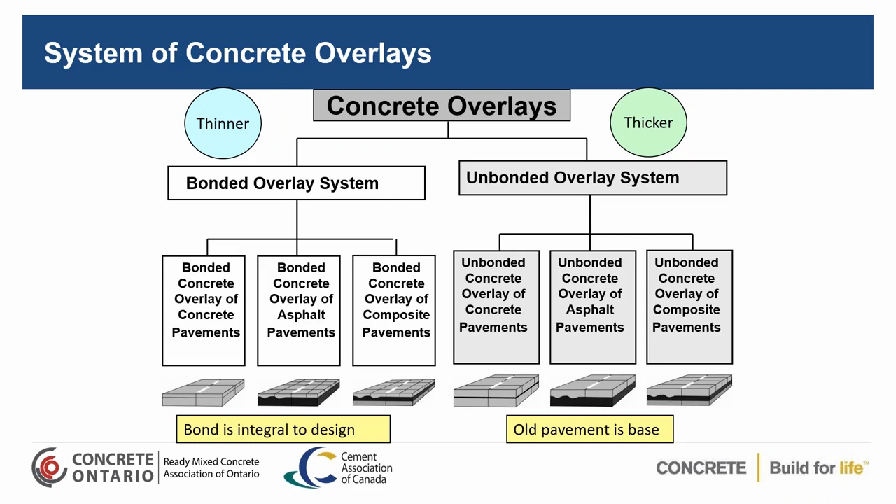So the more you can have the concrete acting in compression, the more load it can take. Those are two systems - the ones on the left-hand side are thinner pavements, the ones on the right-hand side are thicker pavements. You use an unbonded overlay when you have an asphalt pavement that's severely deteriorated and you don't want to remove all of it, or you have a concrete pavement below that's older and you want to put a new concrete pavement over it. As one of the examples I'll show shortly, you can do an unbonded overlay. So we get the thinner and the thicker - bond is integral on one, and the other is that you have a stiff, strong base when you're doing the right-hand unbonded designs.

So what are candidates? What are you looking for in a job? Well, the one on the right-hand side is Bloor Street in Toronto, where they were having lots of issues because of heavy truck traffic causing rutting and shoving in this area. You have to look at the traffic level, and the condition of the existing pavement, and that will determine what thickness you're going to go with for the concrete pavement, and also what you're going to have to do with the asphalt - remove it all if it's in bad condition, or use some of that asphalt structure to help in your new pavement design.

When you're looking at design issues, you're going to look at thin versus thick. When you're looking at thickness, that's going to tell you whether you're going to be able to utilize some of that strength in the asphalt that's left, if any. And then you're going to look at your joint spacing - what's the joint spacing going to be compared to the thickness of the pavement? You're going to try to decide whether you want to use dowels, and whether you're going to need tie bars and longitudinal joints. So you have to look at all these issues, and then construction issues.

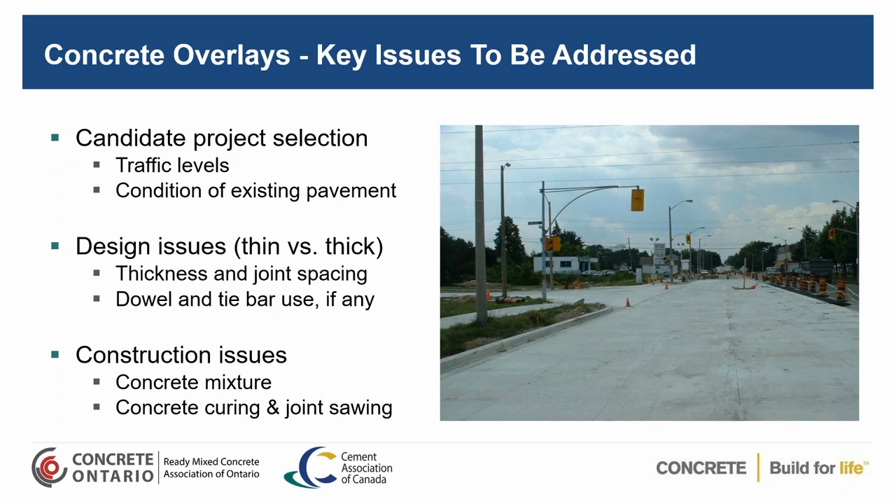As I mentioned on the 7-3 fire station in Vaughan, we could have gone with a doweled pavement and been a little bit thinner, but because of the complexity of the jointing and the configuration of the area where the fire station was, we chose to go with an undoweled pavement. So you have to look at that. You have to look at your concrete mixture - what strength you want. The strength of your concrete will affect the thickness. The load, the thickness, and the strength are three of the key factors when you're doing the concrete design. Curing is a must with any concrete pavement, and sawing joints is a must if you want to control those saw cuts.

So this is Sprague Road. This was actually an old concrete pavement underneath an asphalt pavement. They had between 130 to 180 millimeters of asphalt that was starting to deteriorate substantially. Instead of milling all that asphalt off and redoing asphalt again because of the frequency of problems they were having, they decided to remove all of the asphalt, 130, 150, 180 millimeters.

The exposed concrete that was there was not in very good shape, so they said let's go with an unbonded overlay. They put 50 millimeters of asphalt back, and then a new pavement at 160 millimeters with a shorter joint spacing, so the panels would act more in compression than tension, allowing them to decrease thickness without worrying about pavement elevations. They've had a very well-performing concrete pavement.

It again was a 32 MPa Class C2 exposure. They used a burlap drag first to give better micro texture, and then did tining of the surface on top, transverse tining. I actually like longitudinal tining because it's quieter. With transverse tining, the deeper you put it, the louder the noise from your pavement will be. It doesn't have to be very deep to provide that channel for water to drain off the pavement and give a better pavement-tire interface, but if you make it too deep it will be a louder road.

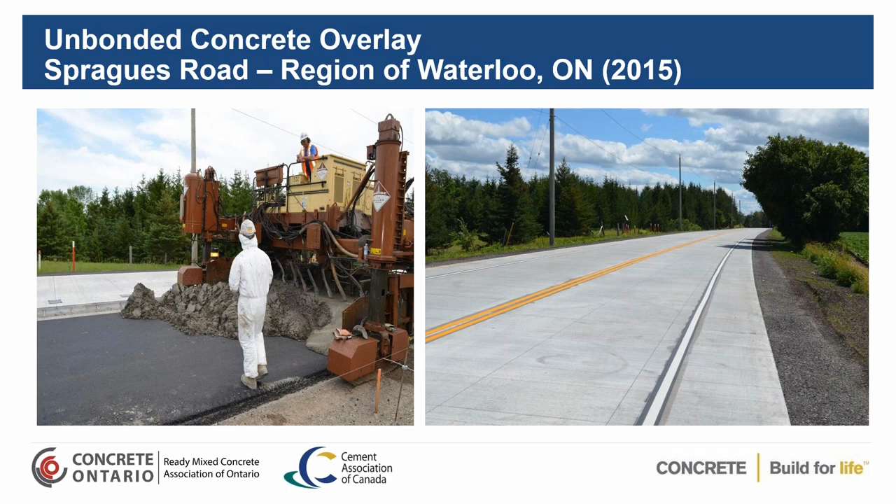Now this is another overlay, a kind of test section. As you can see on the right-hand side, there was severe deterioration of the asphalt pavement, so they decided to do an unbonded concrete overlay. This was a test section done in three different stages. In Section 1, there was an older concrete pavement underneath, so they put a geotextile down over the old concrete as a bond breaker.

Then they put 100 millimeters of concrete back with short joint spacing, 32 MPa Class C2 exposure with fibers to help with strength. The next section had a 25 millimeter asphalt overlay, then 32 MPa Class C2 concrete on top. The third section had a 25 millimeter asphalt separation layer, then 32 MPa concrete Class C2, but with microfibers.

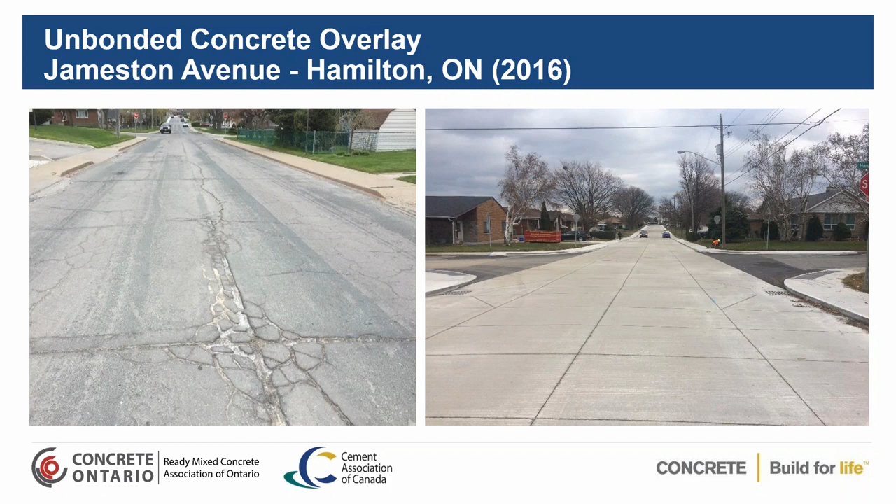So now they have three different test sections that they're analyzing to see how this project will go. It was built in 2015 and has performed very well.

So what are some of the keys to good performance? We went through the benefits and a number of projects to show concrete pavement being used. The most important thing is uniform support. If it's a long project and the strength varies, you transition from one subgrade type to another, blending them together over a 500-meter area so you have uniform support underneath your concrete and don't have to worry about hard or soft spots.

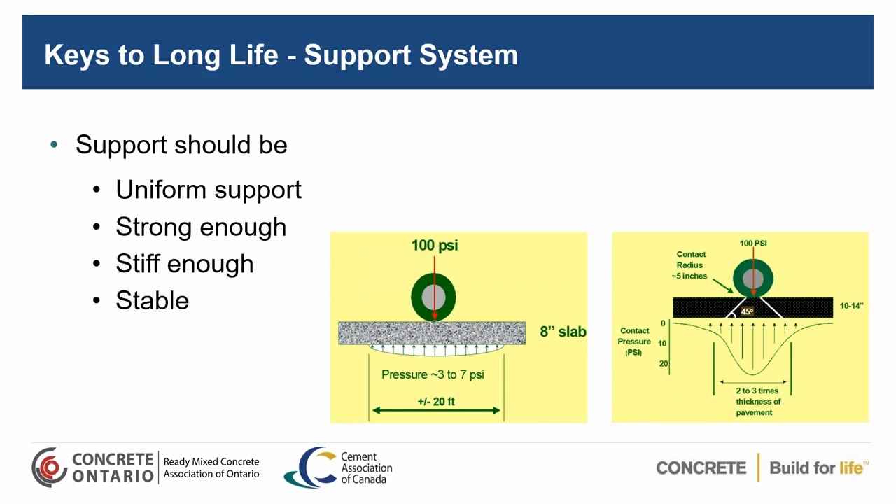This prevents cracking that may develop in your pavement because you're working with a uniformly strong or uniformly weak area. If you're building over peat, you'll need something like lightweight cellular concrete as a foundation layer, but that's a rare case. You always analyze your subgrade and identify if it has the right plasticity index, and if not, you can modify it by cement stabilizing the subgrade. There's a lot you can do, but you want a consistent subgrade to work with.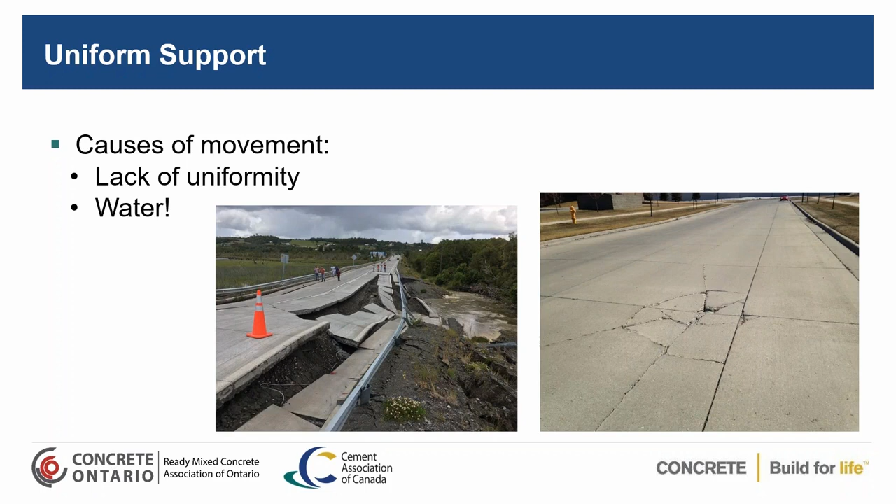Quality material is also very important. We recommend following CSA A23.1, Class C2 exposure. When you have a Class C2 exposure, CSA tells you that your maximum water cement ratio is 0.45.

If you're doing flatwork finishing by hand or by screed, you're probably going to be closer to 0.45. If you're doing a slip form paving process and you need a stiffer mix, you're probably at a water cement ratio of 0.4. You still have enough water in there to have complete hydration of the cement.

You're going to have a lot less bleed water, so you're not going to have to put the curing compound on right away on a job that's being hand finished or finished by a vibratory screed. When you're dealing with the lower water cement ratios of the slip form paving machine, as soon as you slip form the material, you do a highway straight edge to give it the smoothness you're looking for.

Then you're going to get the tining and put that curing compound right away to ensure that you seal that water in there so you get complete hydration of the cement and a durable surface, because you don't allow the water to evaporate from the surface.

You also want a 32 MPa concrete in 28 days in an air category of 1. The air content will depend on the maximum size aggregate. If you have small aggregates, you'll have more paste around those aggregates, so you'll need more air entraining. The larger the size of aggregate you have, the less paste you have, so the less air entraining required to give you the same or equal performance.

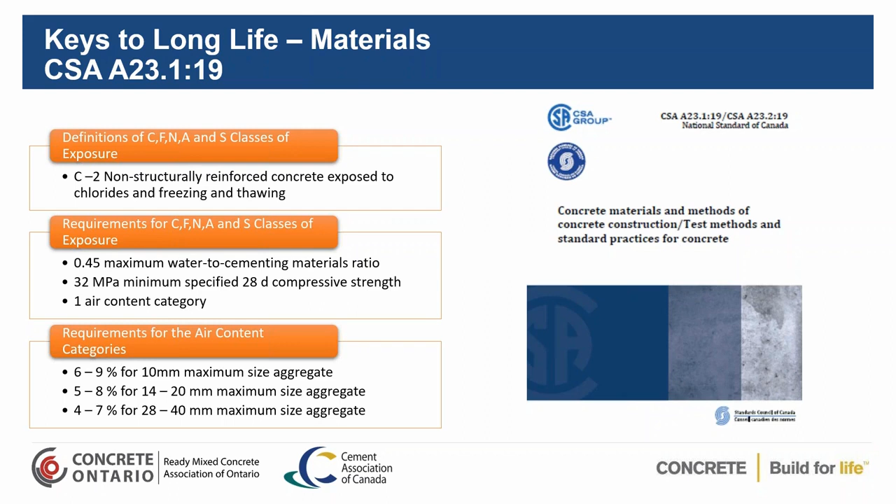As we're in Ontario, we're highlighting OPSS. The OPSS specs by MTO are very detailed, and the basic one would be 350, the construction specification for concrete pavements and concrete bases. But as with many specifications, they always reference other specifications.

I just put a few of them down. You have your OPSS 314, the construction specification for untreated granulars, base, sub-base, surface, shoulder, and stockpiling. That's another key one. Then you have your specification for compaction, with compaction requirements and densities required for your layers.

And then there's OPSS.MUNI 1350, and we also have the OPSD specifications, which are the specifications for concrete composite pavement, utility isolations, concrete pavement jointing details, and concrete barrier and curb with gutter details. So there's a lot of different OPSD series drawings that you can obtain through MTO.

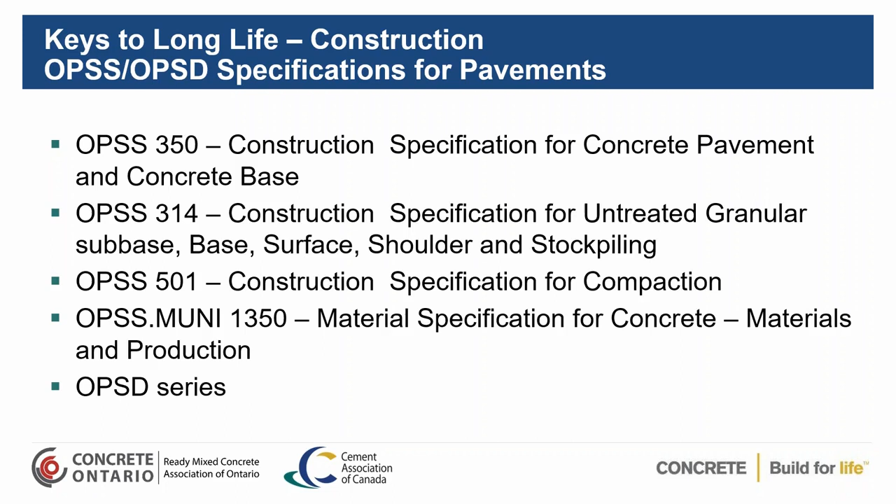So what can we do as an association to assist you? We can help perform preliminary designs. Both Concrete Ontario and the Cement Association of Canada are not licensed to do final designs, although I work very closely with engineers to help them do the designs. I teach how to use the software, and also discuss the jointing and thickness designs, etc. But as an association, we can only assist in that process, we can't do the final designs.

That's why it's important to hire a good engineering firm that understands concrete pavement thickness design and jointing. A perfect example would be back when I looked at Fire Station 7-3. We did the pavement design, thickness design, and then they were going to do the jointing plan themselves, and then they sent it to me to review.

I reviewed it, and it had acute angles, slab widths and lengths that were 2 to 1 instead of the 1.5 to 1 maximum that you're allowed. There were just a lot of jointing issues with it. They didn't isolate the manholes and catch basins and things like that. So it's very important to hire a consulting firm that can actually go through and assist you in doing the designs and coming up with a jointing pattern that will actually work for you.

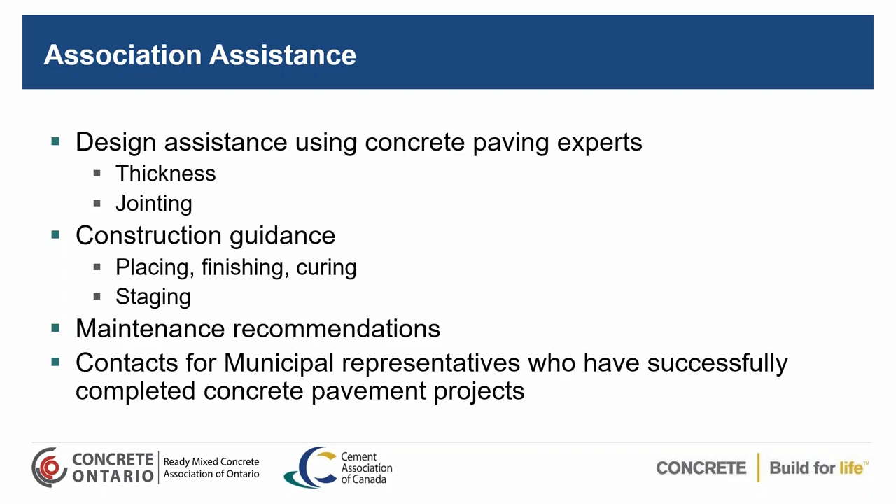Next slide. Now time is for questions.